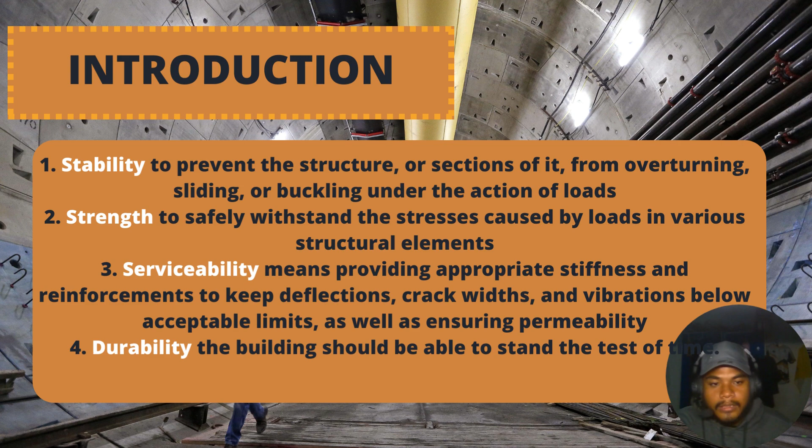In building designs, there are four main factors. First is stability, to prevent the structure or section of it from overturning, sliding, or buckling under the action of loads. Next is strength, to safely withstand the stress caused by load in various structural elements. Third is serviceability, meaning providing appropriate stiffness and reinforcement to keep deflections, crack widths, and vibration within acceptable limits, as well as ensuring permeability. Lastly is durability, the building should be able to stand.

In designing the building, there must be three phases. First is the planning phase. Building purpose is the most important consideration. Secondary elements include aesthetics, society's law, economy, and the environment. Structural and constructional requirements and constraints may have an impact on the type of building that is built. The final stage involves selecting one or many distinct types of construction.

The second phase is design. This phase comprises a detailed evaluation of the various solutions outlined in the planning phase, with the most appropriate proportion, dimension, and details of the structural parts and connections for creating each alternative structural arrangement under consideration. The last phase is construction.

Staff involvement, material and equipment purchase including transportation to the site, and the actual on-site installation are all part of this phase. Unexpected hurdles such as a shortage of required materials, or foundation concerns, may require extensive modification during this phase.

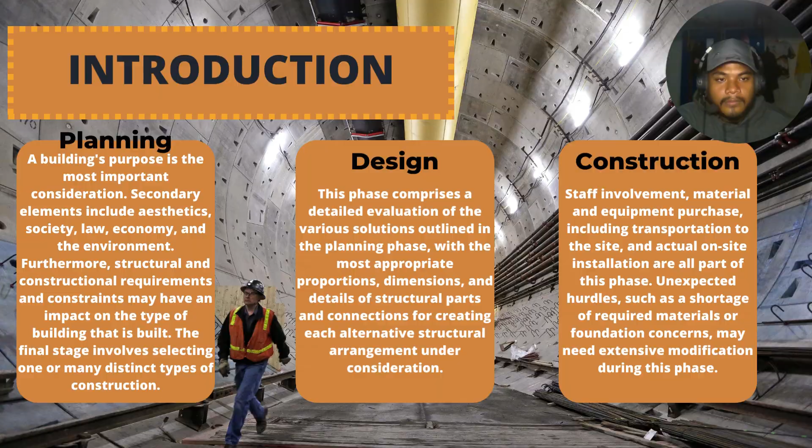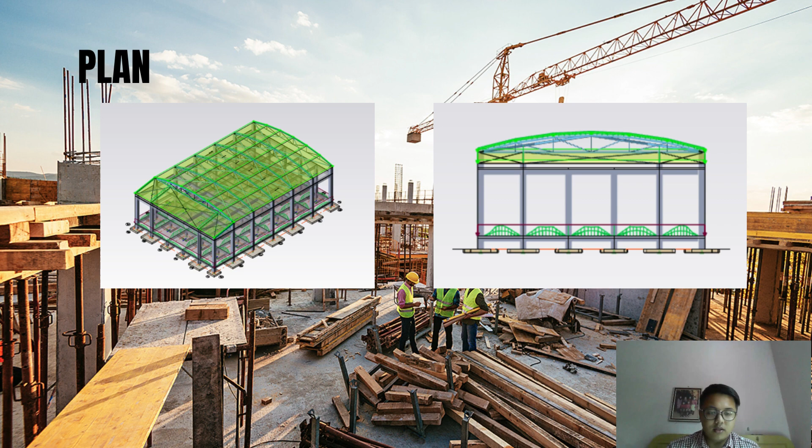Assalamualaikum and hi. I will continue the presentation with the plan of the multipurpose hall. In this slide you can see two figures: the first is the design of our structure for the multipurpose hall, and the second is the front view of the multipurpose hall.

We continue to the side view and roof view for the multipurpose hall. The first figure is the side view of our structure, and the last figure is the roof view for our structure. As you can see, we are using...

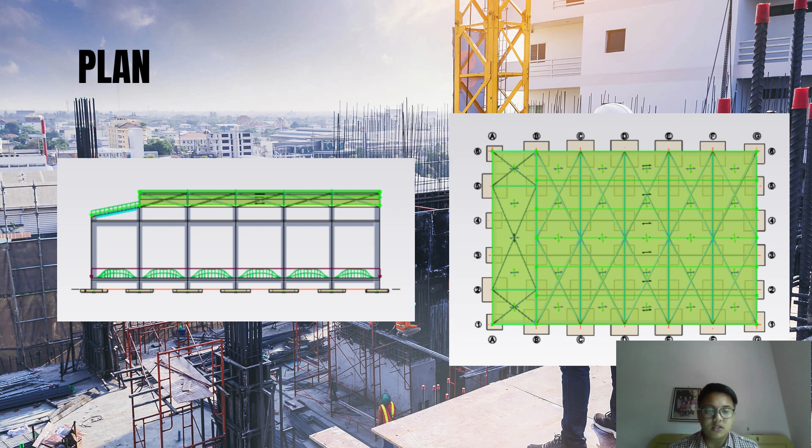Pad footing for the foundation of the structure, because it does not carry a heavy load. So we think that pad footing is enough to carry the load from the structure. The size of the structure is 30 meters by 20 meters, and the height of the multipurpose hall is 8 meters. That's all from me.

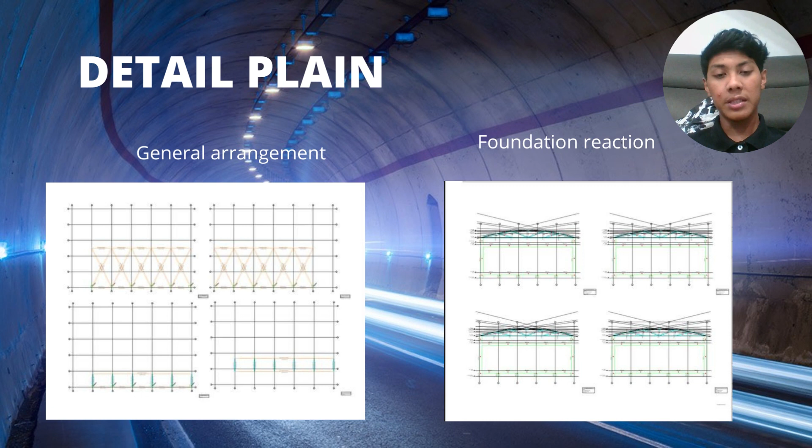For general arrangement, we have a detail plan like this from Tekla, and for foundation reaction we have a detail plan like this. After that, for concrete beam detail, we will get an overview like this, and this is for concrete column detail.

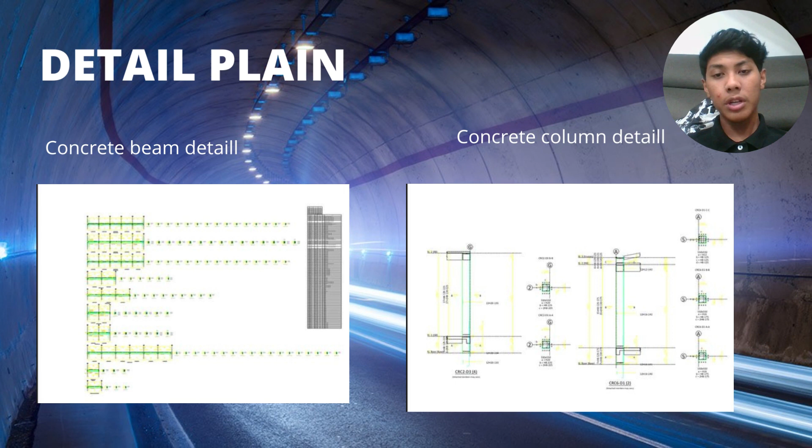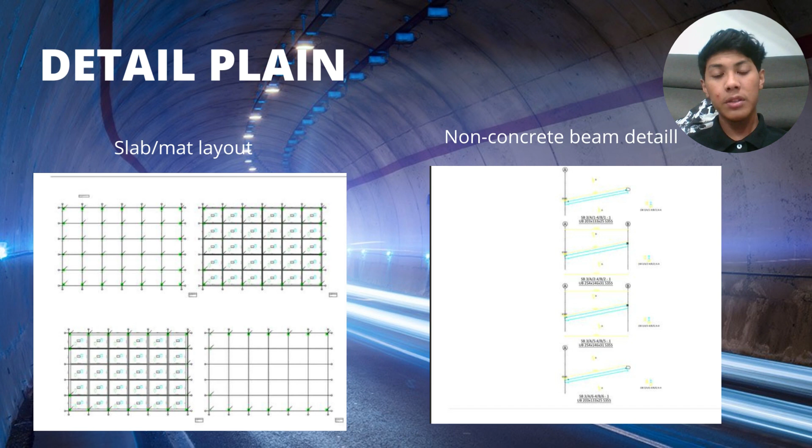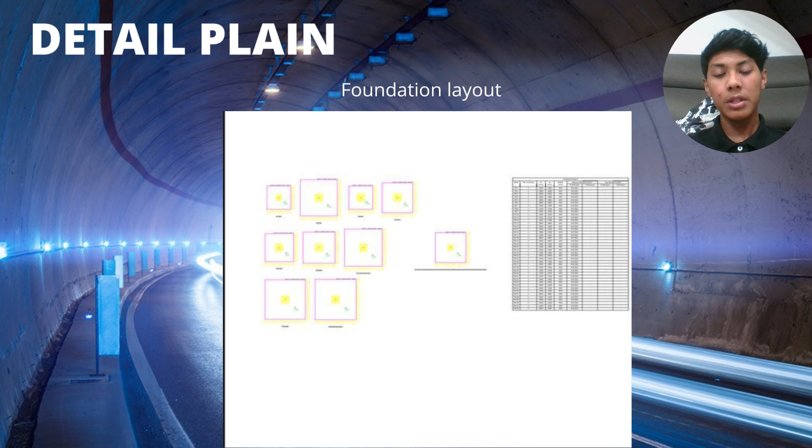Today I'm going to present our discussion on the components that are employed in the construction of our structure. The first one is the reinforced concrete slab. A concrete slab is a flat, horizontal surface made of cast concrete that is used in modern construction. Steel-reinforced slabs, ranging in thickness from 100 to 500 mm, are most typically used to construct floors and ceilings.

The next material is beam. A load-bearing structure, a concrete beam may handle both horizontal and vertical loads. Reinforced concrete beams, often known as RCC beams, are made by encasing steel bars, plate, or fibers within concrete.

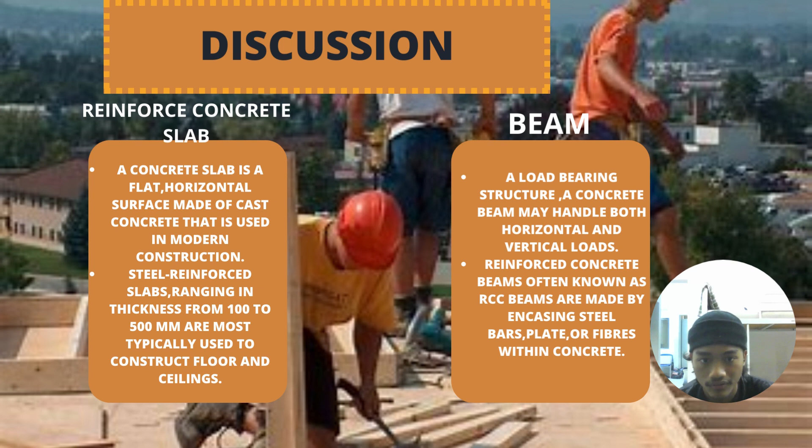For the third component is column. A reinforced concrete column is a concrete structural component with an integrated steel frame that is designed to withstand compressive stresses. The fourth component is truss. A truss is basically a triangulated arrangement of straight structural elements that are linked.

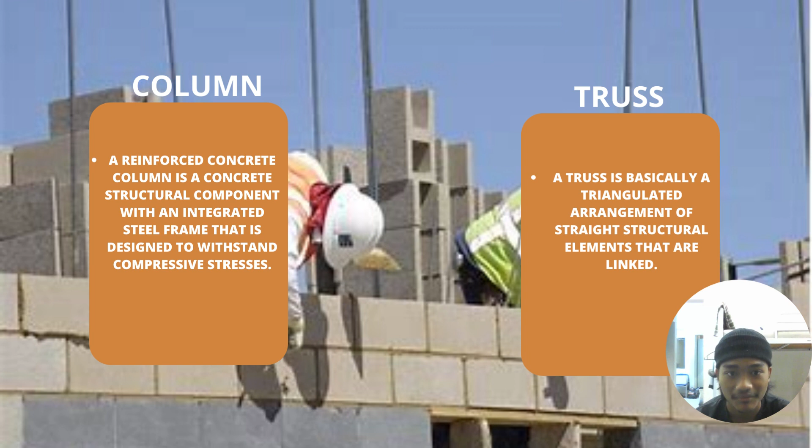For the fifth component is a roof panel. A roof is a structure's top covering, consisting of the materials and structures necessary to support it on the building's wall or upright, while providing protection from rain, snow, sunlight, temperature extremes, and wind. The roof is part of the structure's envelope.

For the next component is brace. A bracing system is an optional but important part of the building process. During construction, a bracing system is utilized to hold the principal girders, disperse load effects, and prevent compression flanges or chords from buckling laterally.

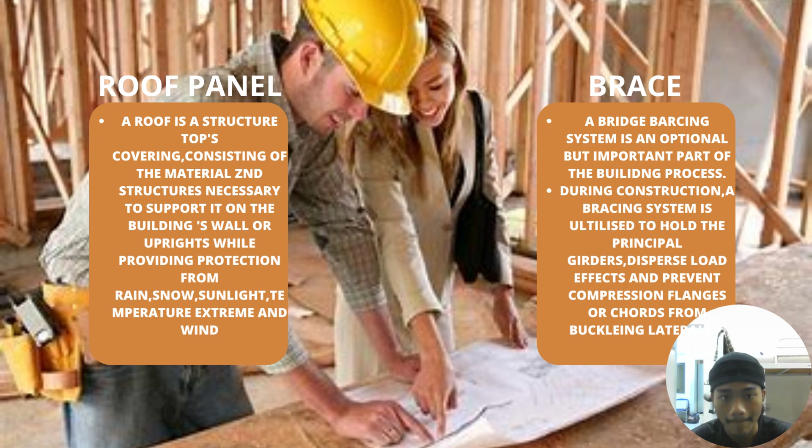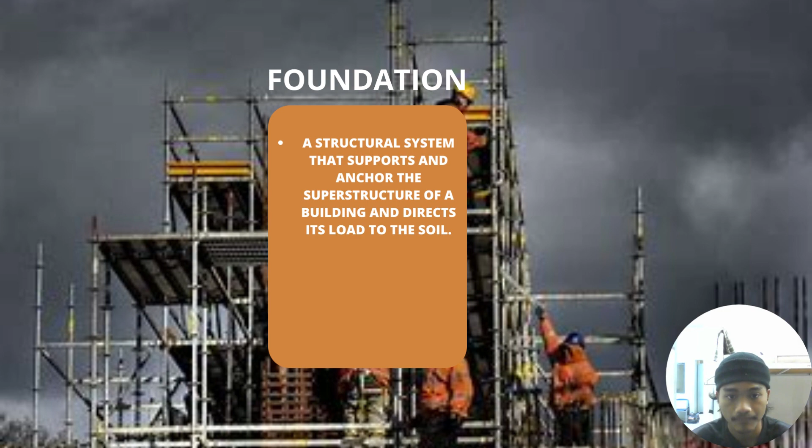For the last component is foundation, a structural system that supports and anchors the superstructure of a building and directs its loads to the soil. The foundation bottom must be below the frost level to minimize damage from repeated freeze-thaw cycles. That's all from me. Now for the conclusion.

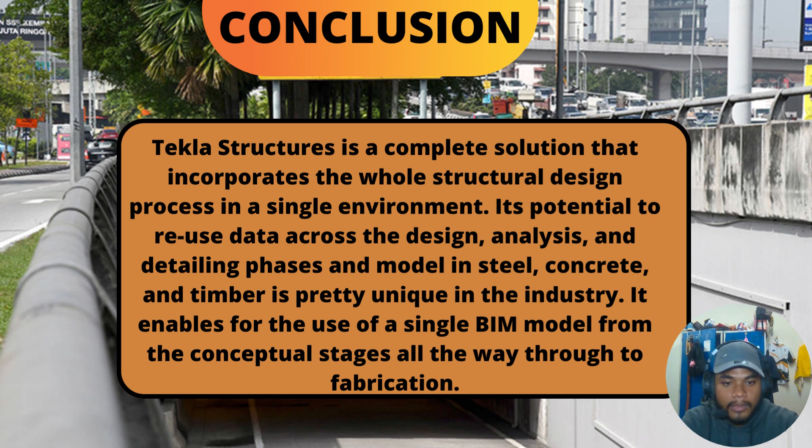Tekla Structures is a complete solution that incorporates the whole structural design process in a single environment. Its potential to reuse data across the design, analysis, and detailing phases, and model in steel, concrete, and timber, is pretty unique in the industry. It enables the use of a single BIM model from the conceptual stage all the way through fabrication. That's all from our group. Thank you.